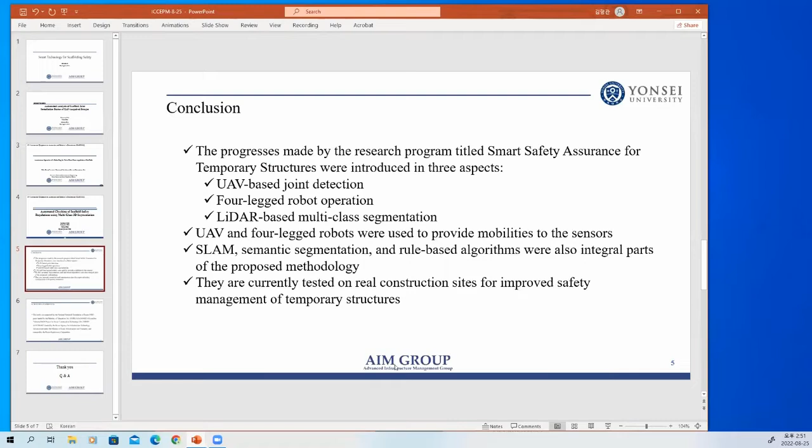So based on these three conference papers, I'd like to talk about smart safety assurance technology for temporary structures. First of all, I'd like to talk about how we can check the safety of joints of temporary structures.

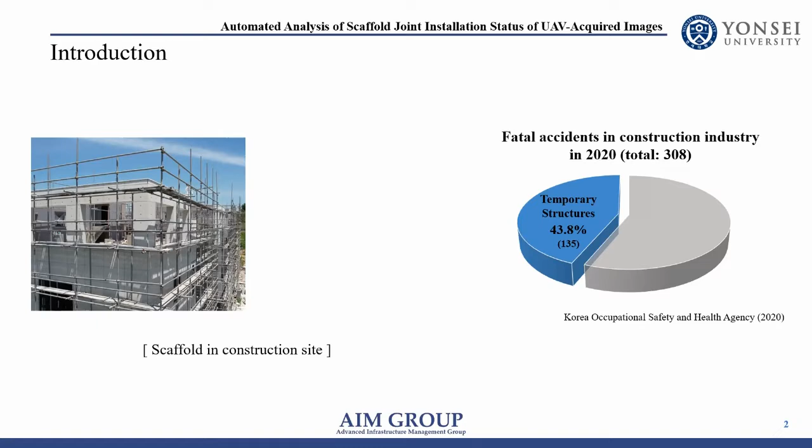Professor Park gave us very wonderful statistics regarding the notorious safety record of the construction industry. In fact, scaffolding is a major part of that unfavorable statistic. For example, according to the Korea Occupational Safety and Health Agency, temporary structure related accidents account for more than 40%. So you can imagine how significant this issue is when it comes to construction safety.

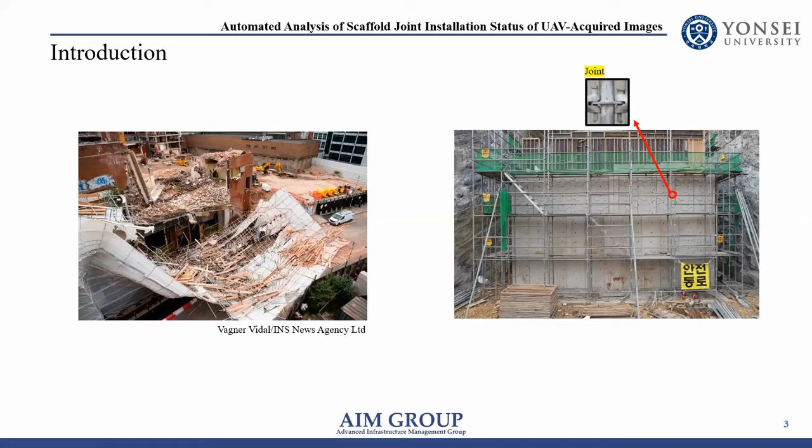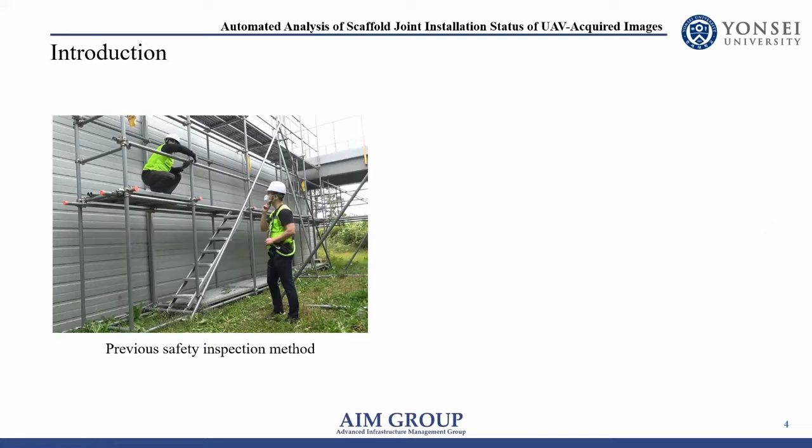In the right figure, you can see this joint area. In many cases, when this joint is not properly installed or assembled, these temporary structures, scaffolding, tend to collapse. Now people are looking and watching to find out if there are any safety issues related to the scaffolding joint. But what we are suggesting is drone-based monitoring with the help of deep learning and computer vision.

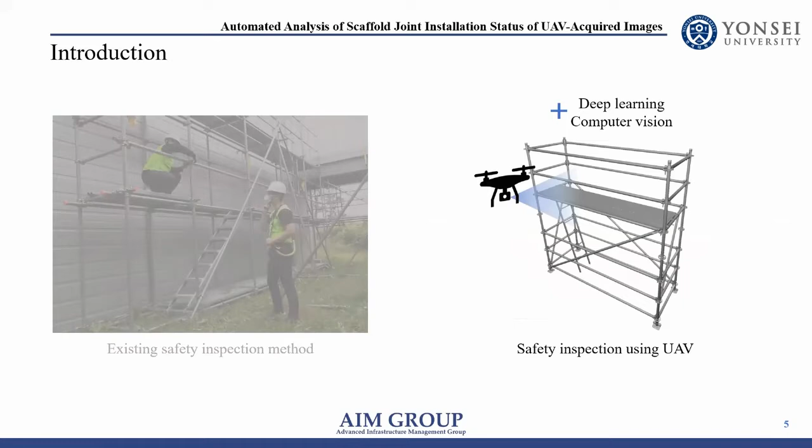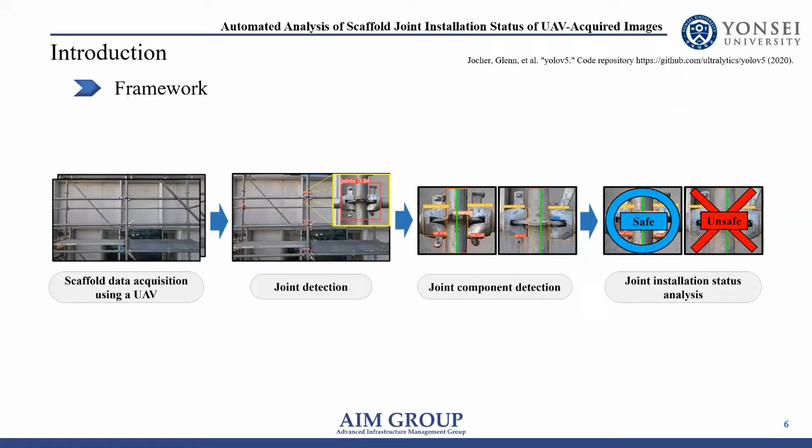This figure shows you the process of getting safety information for the joint. First, we have to get the data from the UAV. To do that, we first identify the area of the joint. Then we go deeper to find the components of each joint. The combination of these components can help us figure out whether or not any particular joint is safe.

In this figure, for example, you can see the left figure is safe because this tail is properly installed. But in the right figure, the tail is missing. Then you can easily think that this joint could become a cause for the collapse of that particular scaffold.

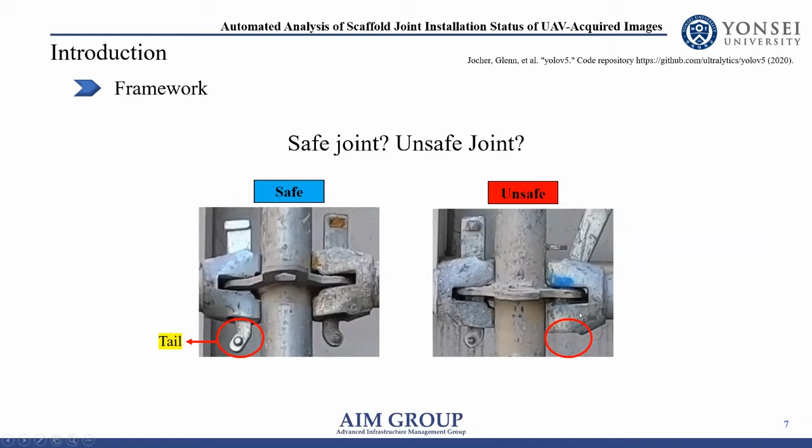So the methodology goes like this. As the first step, we identify the joint. This was done using one of the state-of-the-art object detectors called YOLOv5. After we identify the joint area, we extract component information such as ledger end, standard, pinhole, and tail. Pinhole is identified because we want to check the quality of this image.

We are using a UAV, and the UAV is flying near the target scaffolding object. That means the UAV can take lots of pictures of that scaffold. Every second, 30 frames are generally taken. Then we don't have to use every image; we can use only those good quality images.

To check whether an image in our hand is good, we check the existence of this pinhole in the image. If the pinhole is shown, that means this image is an angled image, which is not good. Using this kind of analogy, we can check how good the quality of each image is.

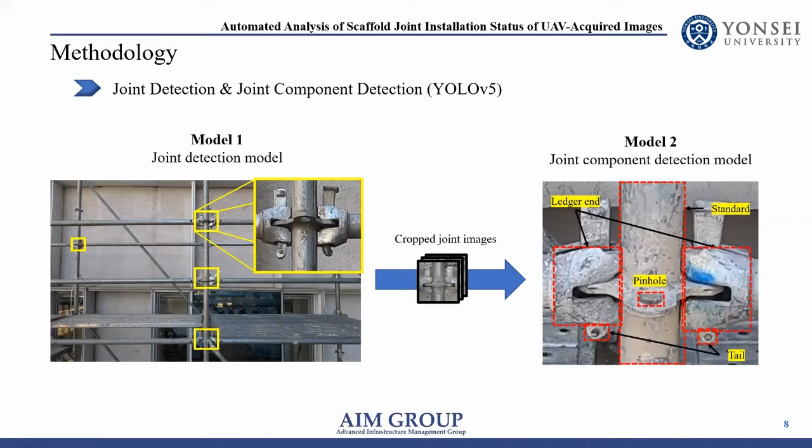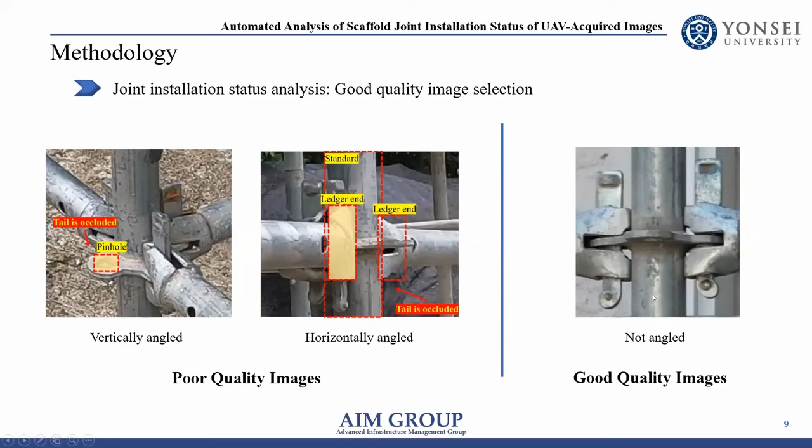This is what I'm talking about in terms of poor quality images - the pinhole is shown or something is occluded. So we are looking for good quality images, which are not angled images. Once we identify those good quality images, we can successfully detect this tail, ledger end, and standard. Based on the combination of these, we can determine if this is safe or unsafe.

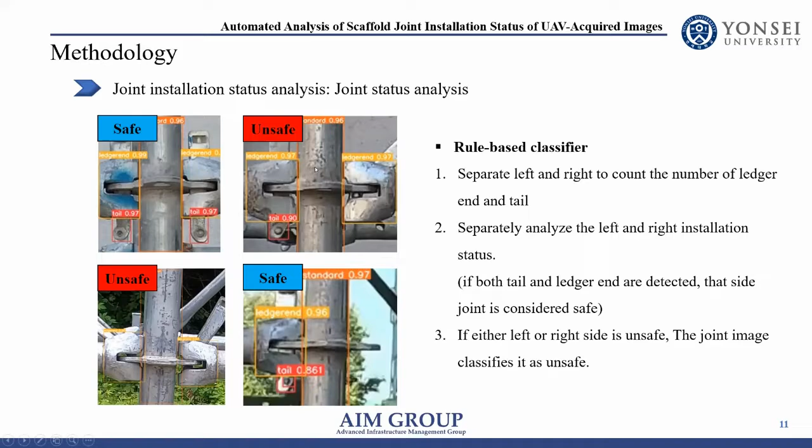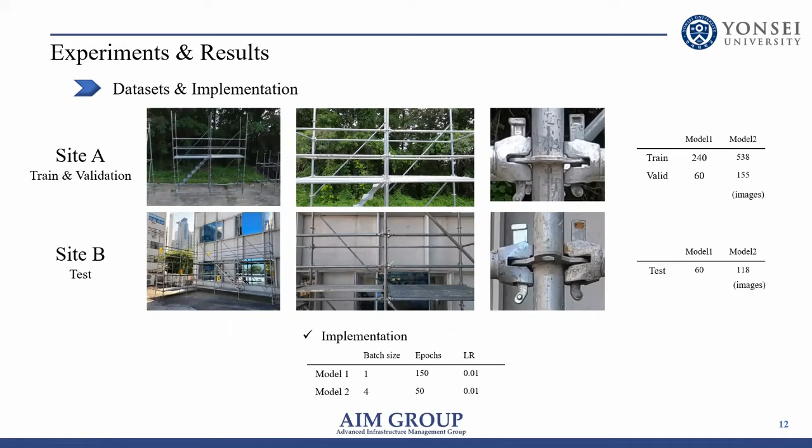With the testing, after getting lots of data - training data, validation data, and testing data - all separated from each other, the result was actually very good.

This video shows you the first step of this proposed method, the joint detection part. And this figure shows you the component detection part. We see some problematic results when it comes to detecting the pinhole part, but when it comes to understanding the overall safety of each particular joint, we got a very good F1 score.

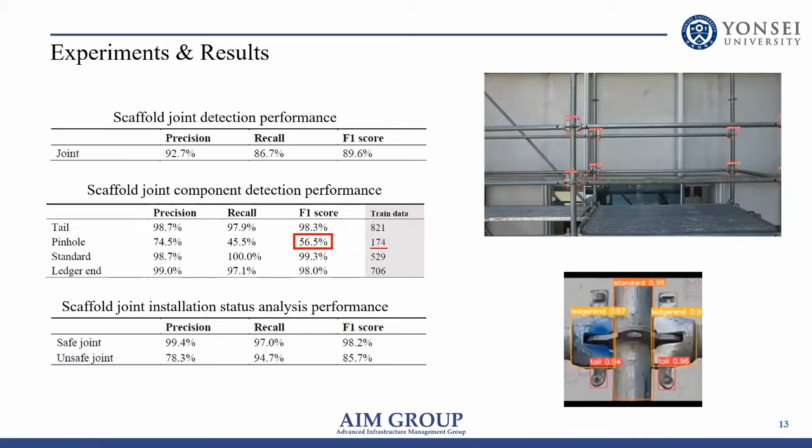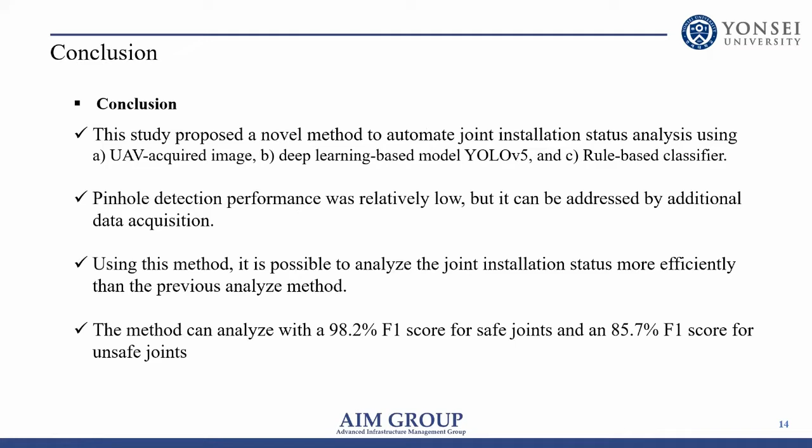In terms of safe joint identification, it went up to even 98%, but we need to get more data to have a more robust and reliable methodology. So in conclusion, this UAV-based monitoring of scaffolding is working up to now, and we got a very high F1 score, so it is promising.

However, UAV is one of those smart mobility that we can rely on. Unfortunately, in many parts of Seoul, we're not able to use UAV, drone, because of the security issue. I'm working for Yonsei University, which is quite close to a place called Blue House. Blue House means the residence of the president of South Korea.

Up until last year, we were banned from flying drone here because it was too close to that Blue House. But from this year, the president moved to another office. So if we ask for it, then we have approval from some authority which allows us to fly drone, but still we have to get the approval first. So it's not easy to fly drone on a construction site. Not just that, flying drone has also some downside too, for various reasons which I do not want to spend time on explaining.

So I try to find a way to use other smart mobility, such as robotic dog, for getting the point cloud of scaffold.

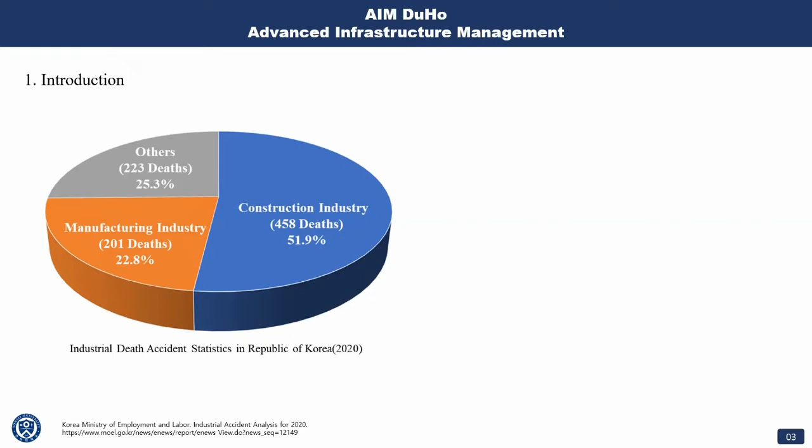I'm showing you another version of statistics. Again, it's painful to share this statistics. Construction industry accounts for more than half of the casualties of industry of Korea. In fact, this bad record of construction industry in terms of safety is applicable to many parts of the world.

And if we do a bit more analysis, as Professor Park said, fall accident is a very important major cause of this construction fatality. And in that, we also see scaffolding is also one of those biggest portions, accounting for about 20%.

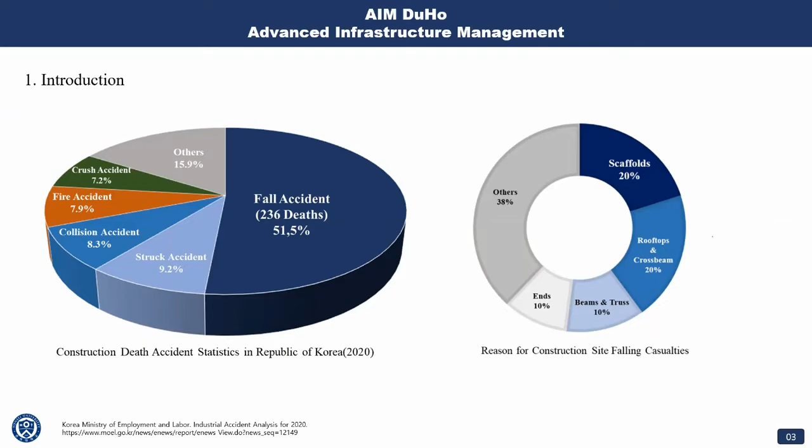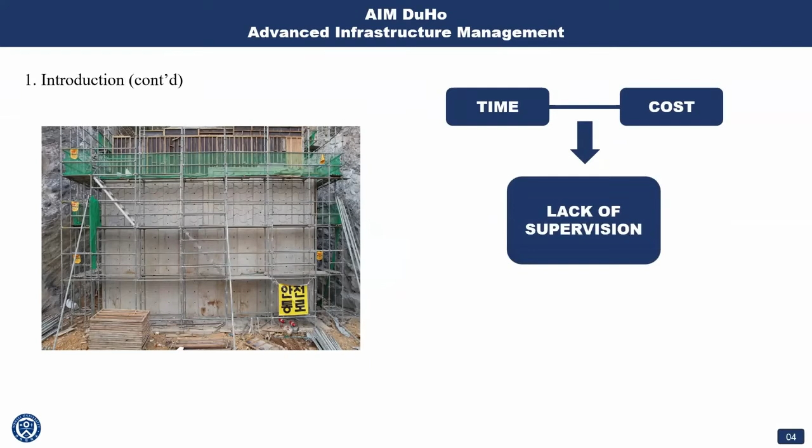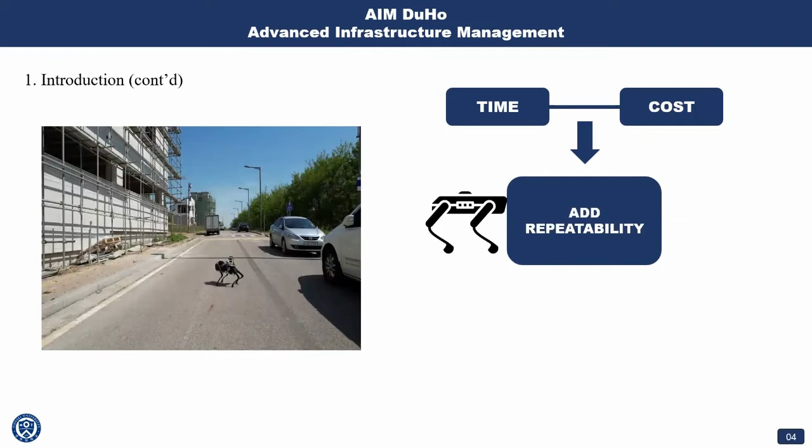So again, scaffolding is a critical element when it comes to safety issues, but time and cost are required to manually supervise the activity of the scaffolding installation and dismantling. So we are trying to use smart mobility, such as this legged robot, for automatic inspection.

So we are proposing a new framework to fully automate the laser scanning process. Yeah, this is fully automated.

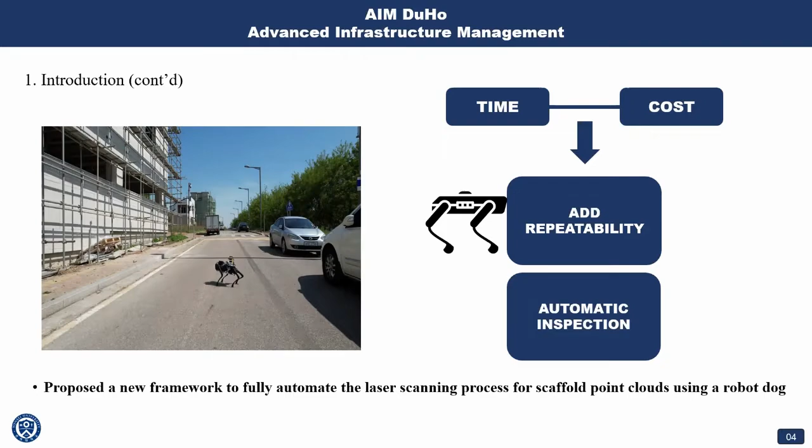Then in the second step, this point cloud data is converted into a 2D image based on this bird's eye view projection. We can deal with the 3D point cloud data as they are, but computationally it's expensive. So we are compressing the amount of data into a smaller scale by using this bird's eye view projection.

Then we can use any kind of state-of-the-art detector to identify scaffold location. Then the next step is intelligent moving around of this robotic dog.

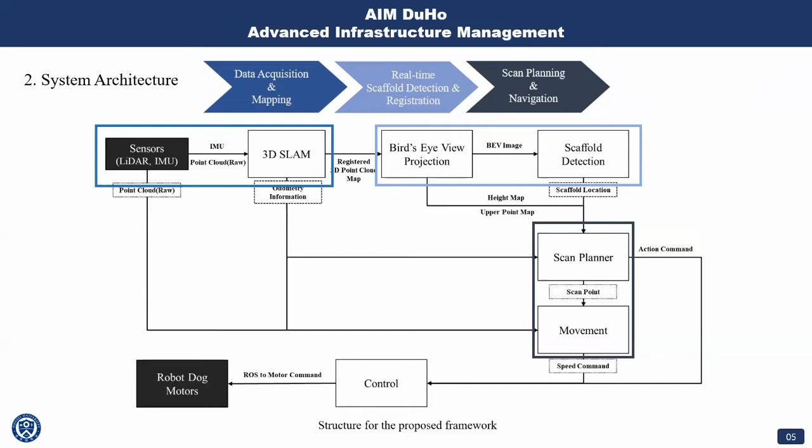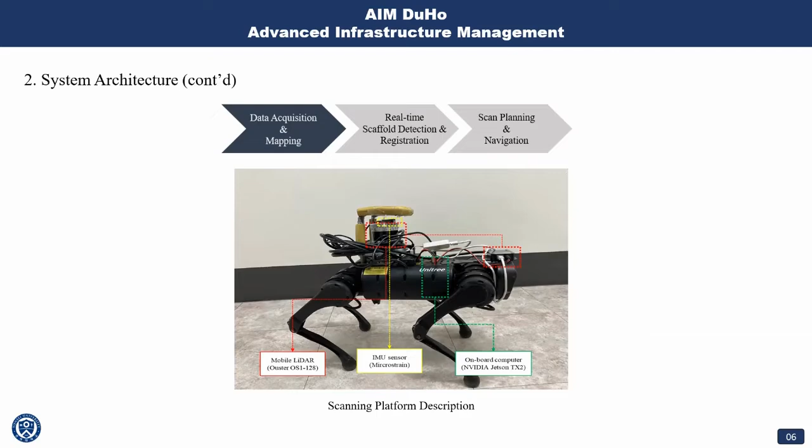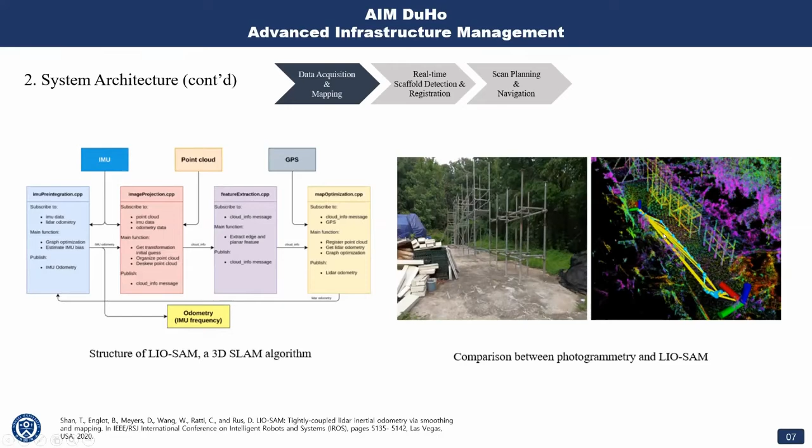So the first part, if I give you a bit detailed explanation, is data acquisition mapping. You can see this algorithm called LIO-SAM, one of those state-of-the-art SLAM algorithms. These algorithms are based on extra information such as odometry, GPS, IMU, loop closure, but we are here not using GPS. You can see this is our test bed on Yonsei University campus, and this is the registered point cloud.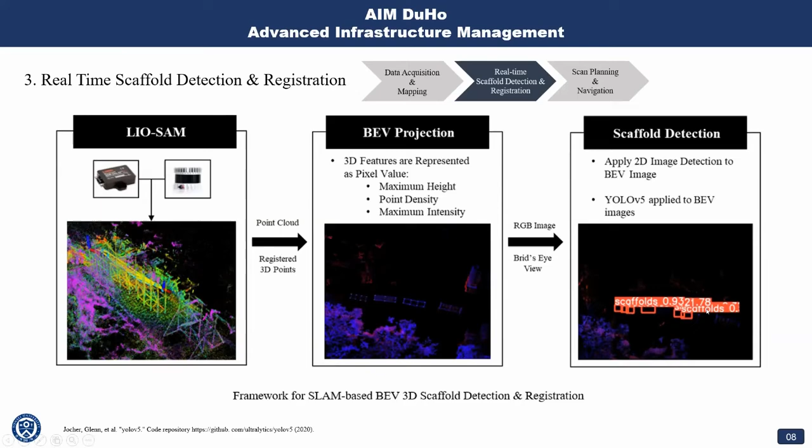We can talk about some strengths of this proposed methodology. Bottom line is this is a real-time process. The robot doesn't have to have prior knowledge of the site. It can just start to move, and over time its map result is more strengthened. So the robot can keep doing its job of understanding the environment and scanning the target object, in this case, scaffolding.

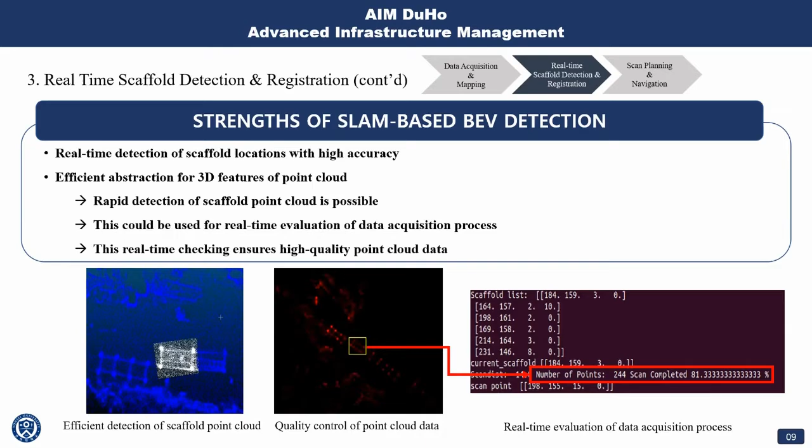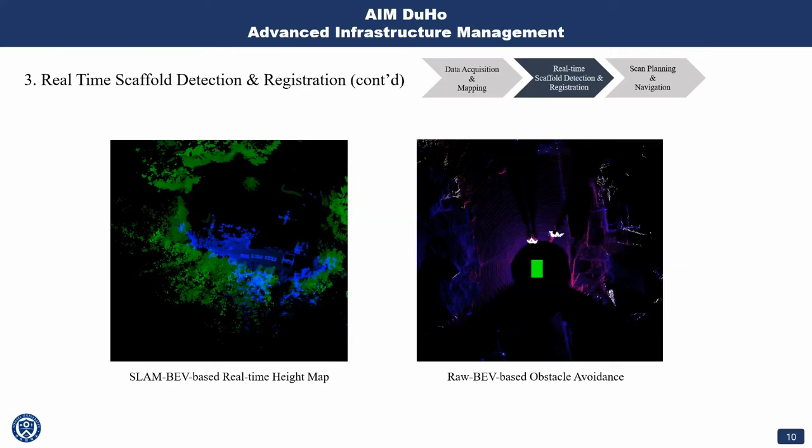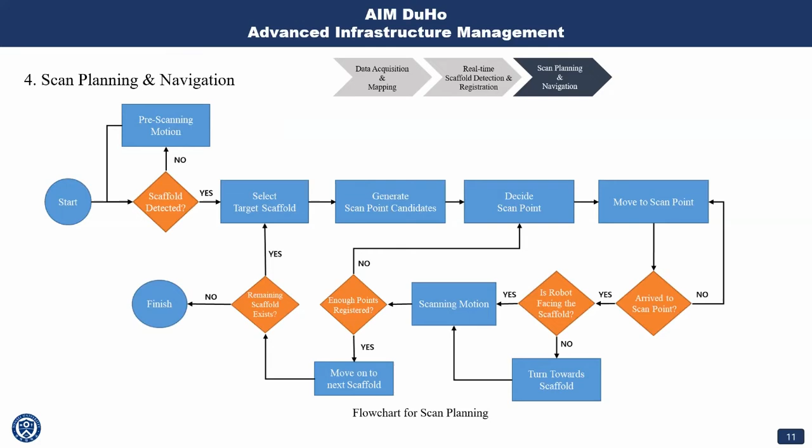Once it arrives, it changes its angle to face the target object and starts to scan. If the number of points of the point cloud data goes over a certain threshold, it moves to the next scaffolding point or even the next scaffold. Otherwise, it goes back to another scanning point location. This is a closed loop process based on the SLAM result, which gets better and better over time.

We even calculated the scanning distance. This is needed because the robot better not be too close to the target object. The LiDAR has this field of view, and when the robot is too close to the target object, the top portion of it probably wouldn't be able to be scanned well. So the robot distances itself from the target object to a degree.

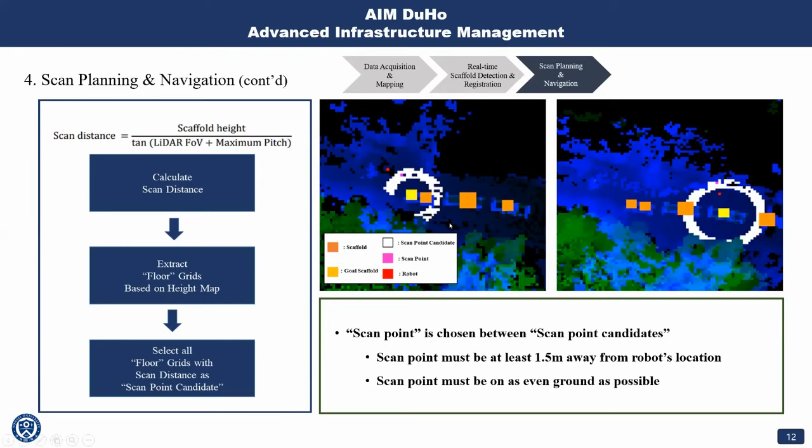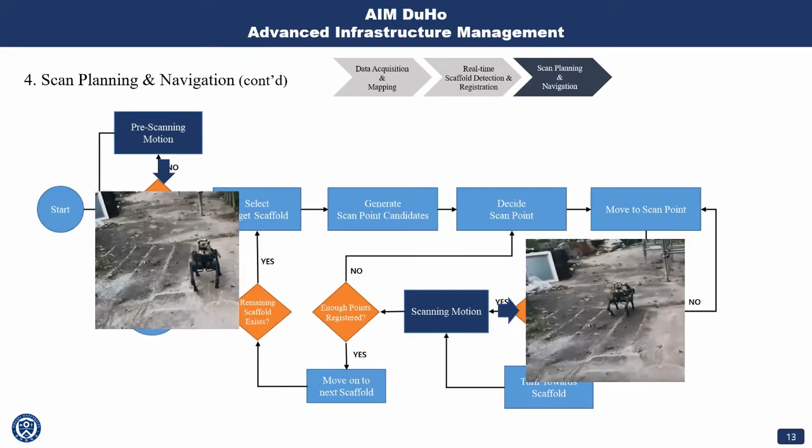Then our robot can do this kind of motion. Trust me, the robot is not suffering from anything. It's just moving its parts to make sure it provides the maximum view to our LiDAR.

So we did some experiments, and in terms of detecting the scanning point and scanning the scaffolding structures, we got an F1 score of 0.796.

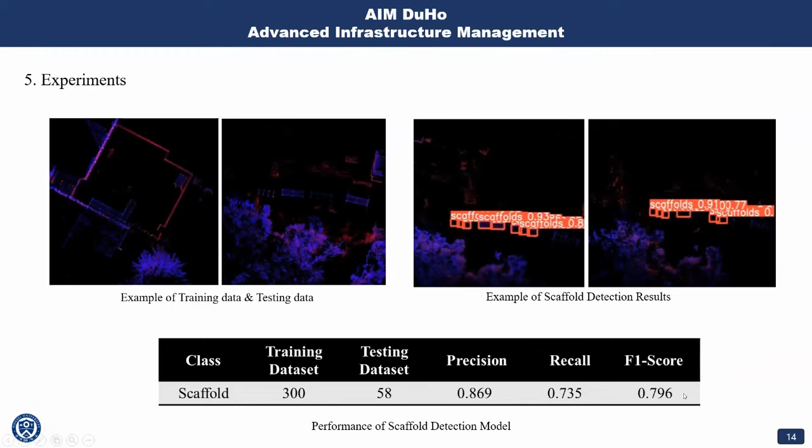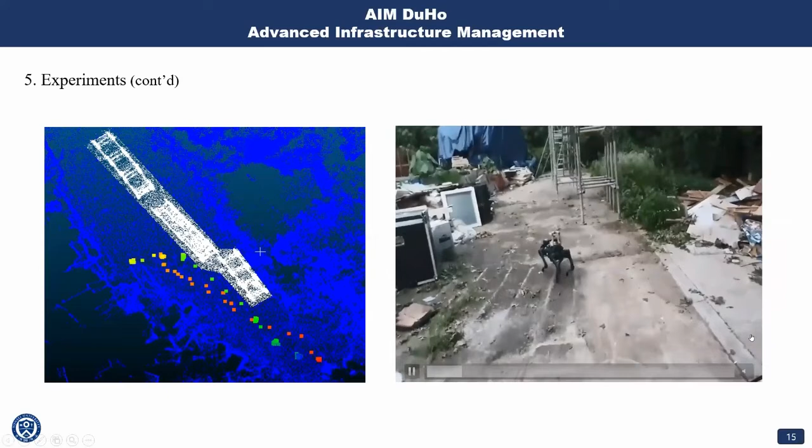You can see how the robot is doing. Our researcher is sitting here, and this was one of those days where lots of mosquitoes were around, so he had this specially equipped hat. But trust me, he's not controlling this robot.

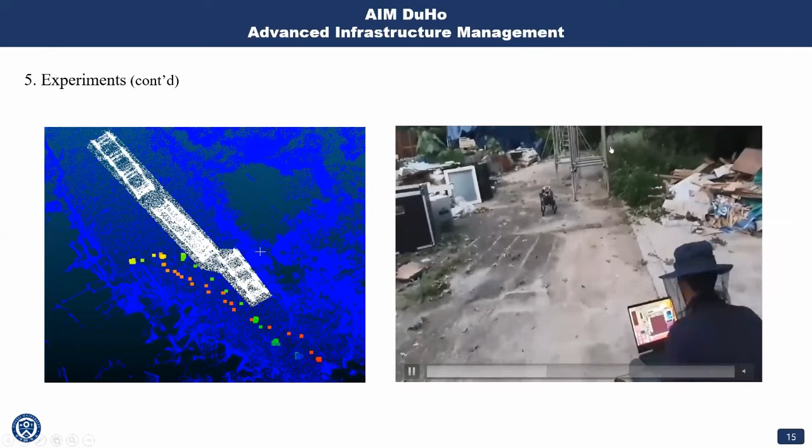The robot is operating on its own, making its movements to measure and scan this target object, and we succeeded in obtaining these temporary structure point clouds.

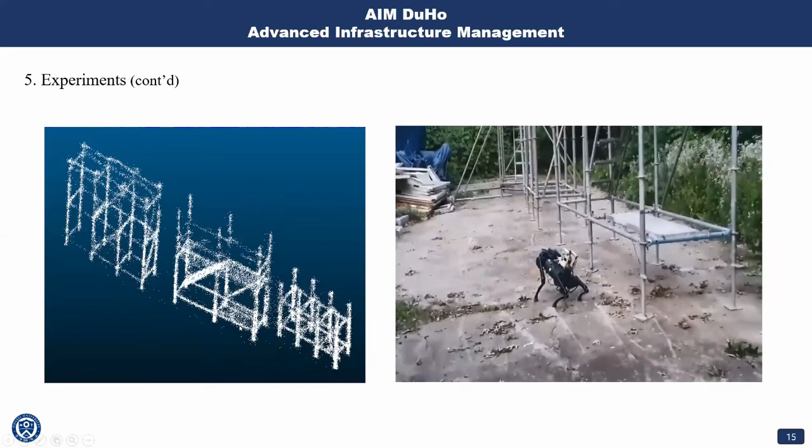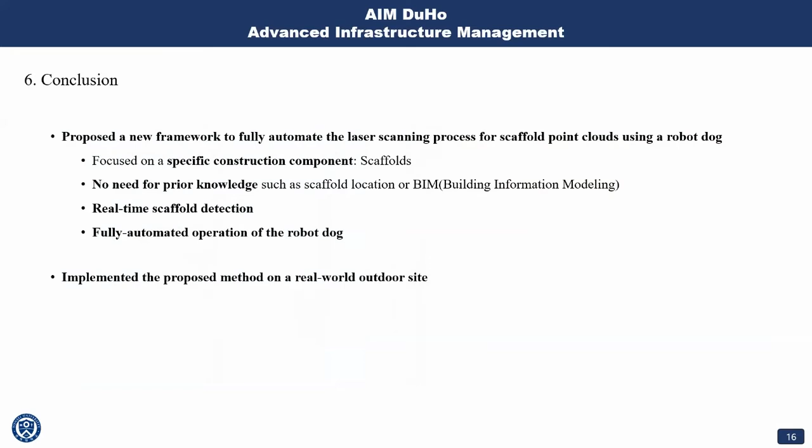In conclusion, we succeeded in developing this autonomous robot operation algorithm, and hopefully this can become robust enough to be applied to more complex construction sites.

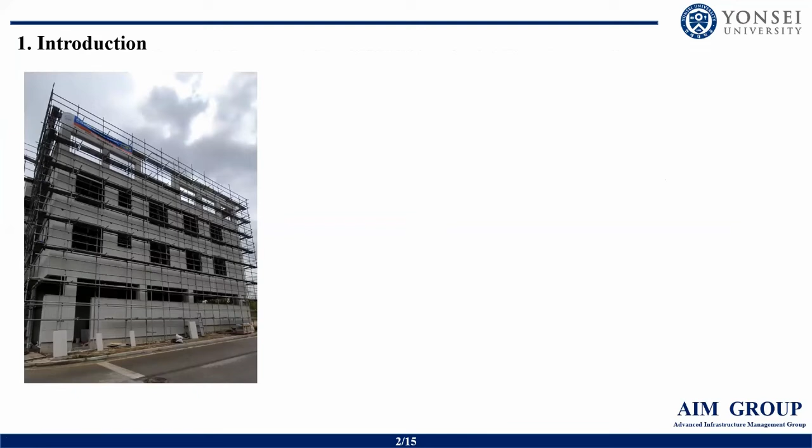Finally, we used multi-class 3D segmentation to understand better the safety of the installed scaffolding.

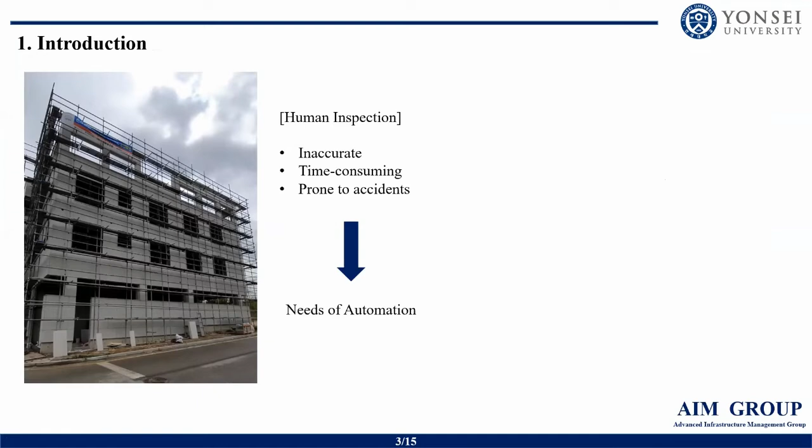Again, some statistics that are pretty tragic, so we have to do something about this. We actually extracted 3 well-known KOSHA guidelines, which regulate the attachment status of a work platform, attachment status of stairs, and attachment status of guardrail.

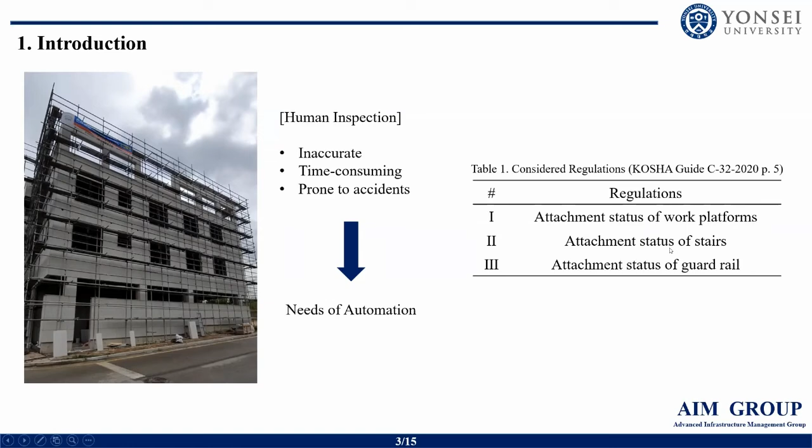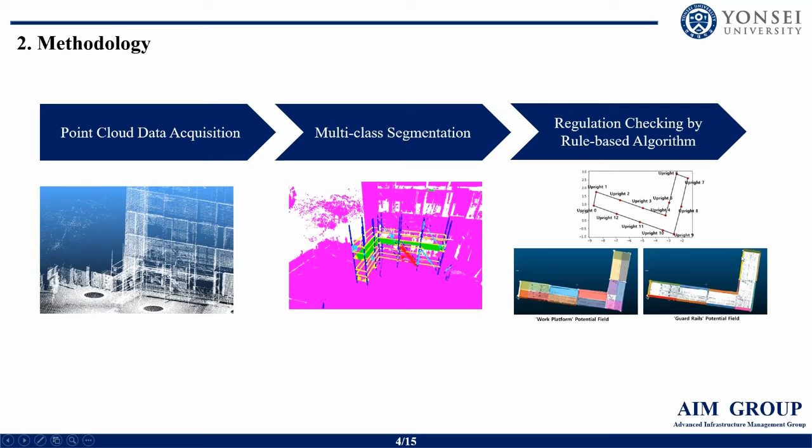I'd like to show you how our technology is able to provide an answer for these 3 KOSHA regulations. This methodology shows you the basic process. First, we get the point cloud data, then multi-class segmentation, then a rule-based algorithm checks the safety of that particular target object.

We secured 4 construction sites, and from these sites we got the data, and we, of course, separated training and testing data.

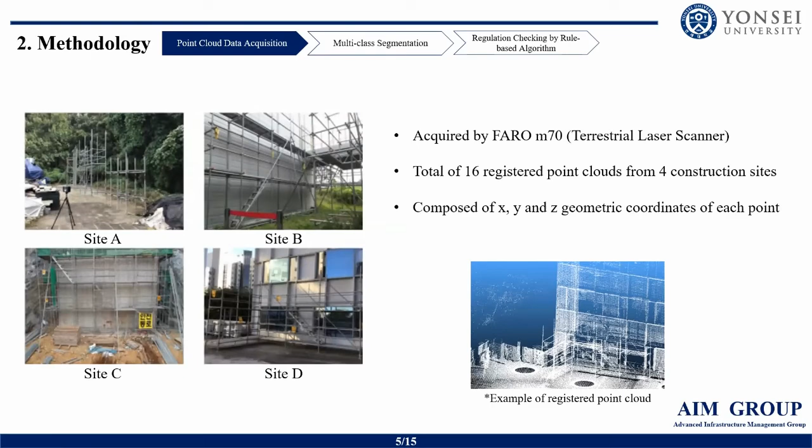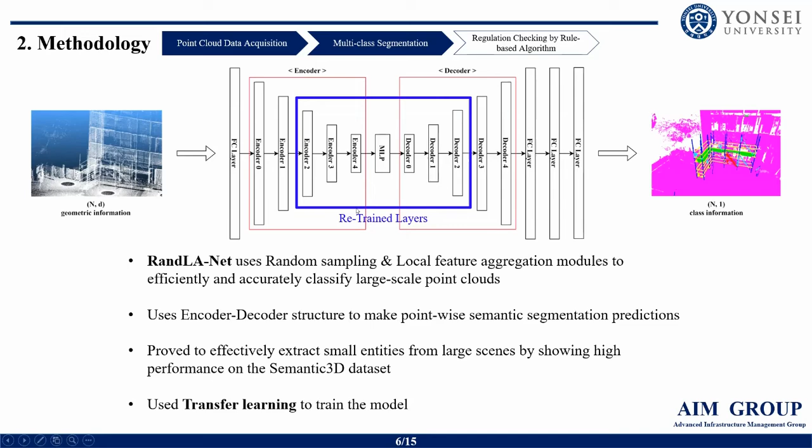This is what is referred to as the segmentation algorithm, RandLA-Net, one of the state-of-the-art semantic segmentation artificial intelligence models. We got the weights from another domain, so we retrained this portion of RandLA-Net. So we can say we use transfer learning.

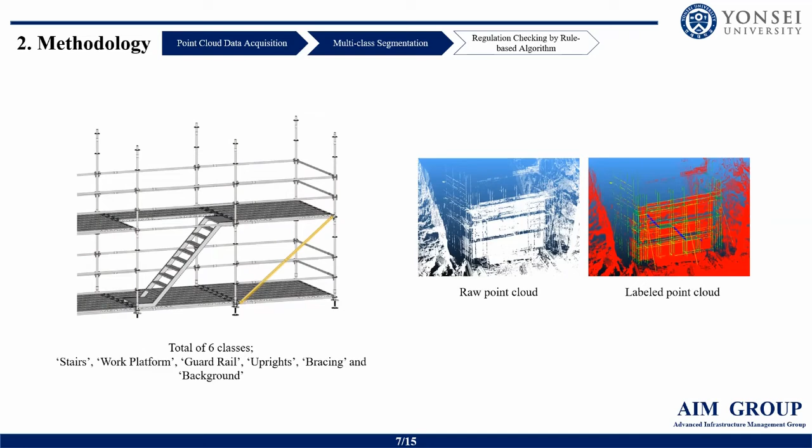For those of you who are not familiar with this scaffolding structure, let me explain. This is the stairs, and this is the work platform on which construction workers walk and do their jobs. This is the guardrail, this is the upright, and this is the bracing. Our job is to identify these elements accurately, and based on that, we will judge whether or not this scaffolding structure is safe.

This is some rule-based algorithm that we developed. Basically, we modified the concave hull algorithm to extract these kinds of scaffolding structures from point cloud data.

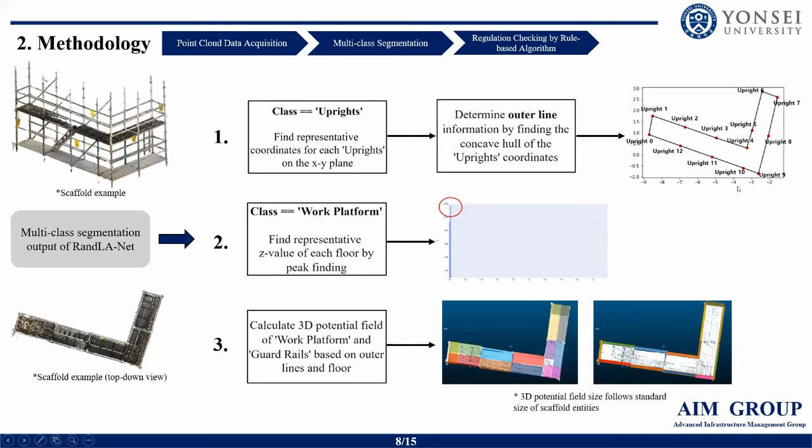Then we started to check with regard to these 3 regulations. The main concept of this checking flow is the potential field. Based on the geometrical properties of the target object, we can predict which area of that 3D point cloud is the potential field for each element.

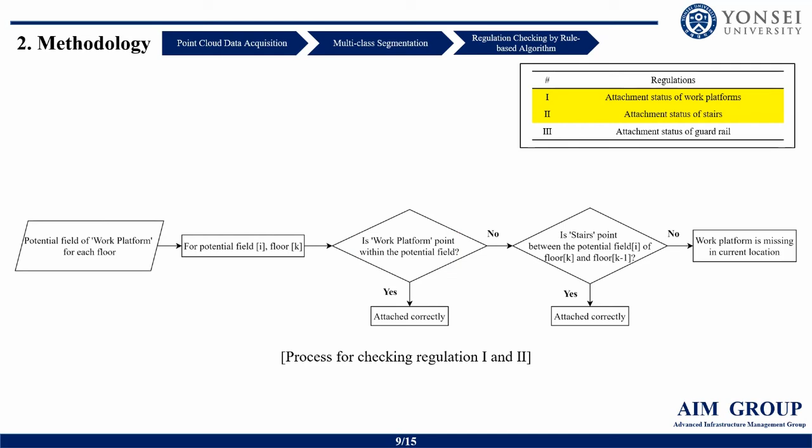So we check if the potential field has the corresponding element. That's the main mechanism of this algorithm. This is the guardrail potential field, and the same principle is applied here.

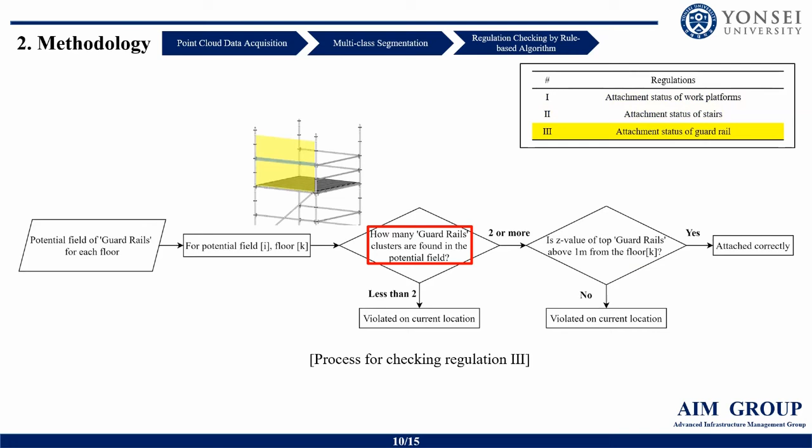I think it's premature to say this now, but later we actually strengthened the data for this bracing class.

Based on the elements I illustrated, now you can see how this scaffolding structure is composed. We identified 13 potential fields, and we purposely identified these areas.

For example, here we can see that this work platform is missing, and that was accurately predicted. But below that we see the stair, so in terms of this regulation, this is okay.

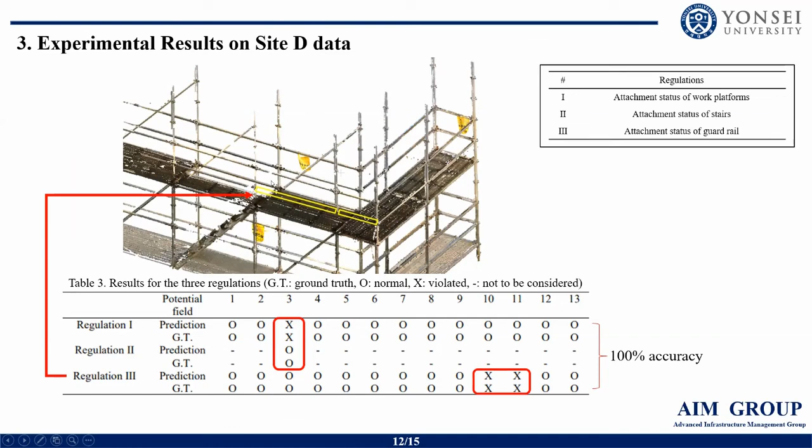However, here we see 2 missing guardrail elements, and that was accurately identified from this experiment.

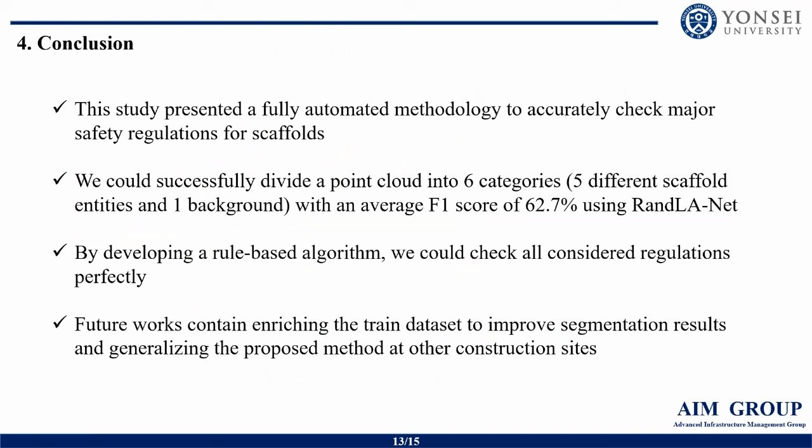So in conclusion, this LiDAR laser system was used, and according to this experiment, it has big potential for accurately understanding the safety status of scaffolding structures on site.

To conclude today's presentation, the progress made by this research program, titled Smart Safety Assurance for Temporary Structures, was introduced in 3 aspects: first, UAV-based joint detection; then 4-legged robot operation; and finally, LiDAR-based multi-class segmentation.

UAV and 4-legged robots were used to provide smart mobility to those sensors, whether image sensors or laser sensors. SLAM (simultaneous localization and mapping), semantic segmentation, and rule-based algorithms were also integral parts of the proposed methodology, and they are currently being tested on real construction sites.

Right now, at this particular point in time, my lab members and researchers are on the construction site provided by Korea Express Corporation, testing these technologies to improve their performance and robustness.